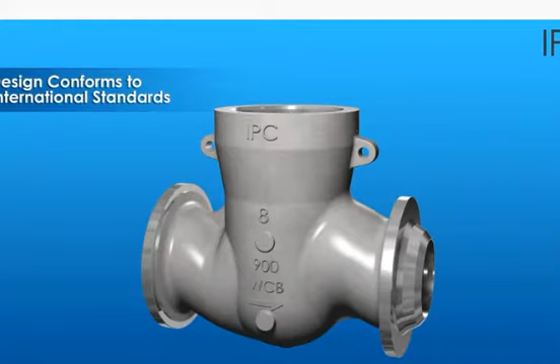هذا النوع الاول اللي هو الدور فالف. هذا هو التركيبه والستركشر الداخلي مالته. هذا البلاك اللي يسوي الاسامبلي، هم البلاك مالته هذا اللي يسد ويفتح الليكويد من خلال البايبات. مثل ما تلاحظون، تشوفون انه شلون جاي يفسخ ويرجع يشد الفالف أو الصمام، هذا الدور فالف.

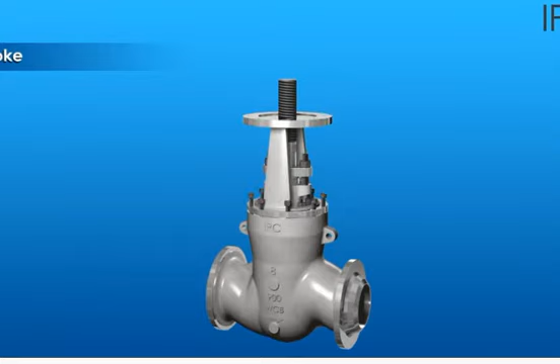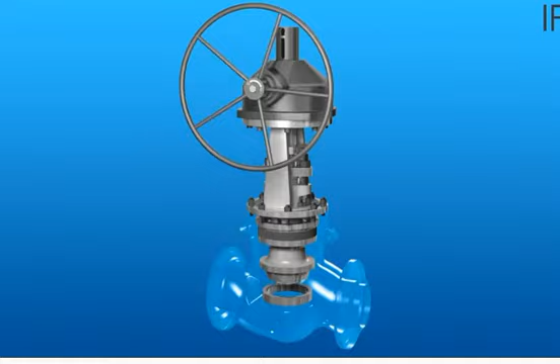يحول الحركة المنوال الميكانيكية إلى حركة عمودية شمالا، صعودا ونزولا، حتى يفتح أو يسد الفالف. مثل ما راح تشوفون الآن ربطه على البايبات، شوف شلون.

الآن راح نشوف البترفلاي، النوع الثاني من أنواع الصمامات، صمام الفراشة.

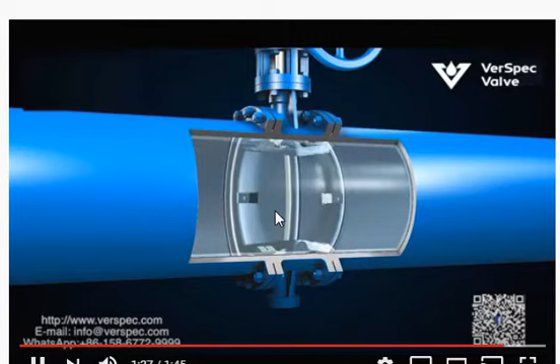الآن نجي إلى أهم صمام أو شائع الاستخدام في القطاع النفطي وهو النيوماتيك فالف، أو أحيانا اصطلاحا يسمونه الكنترول فالف.

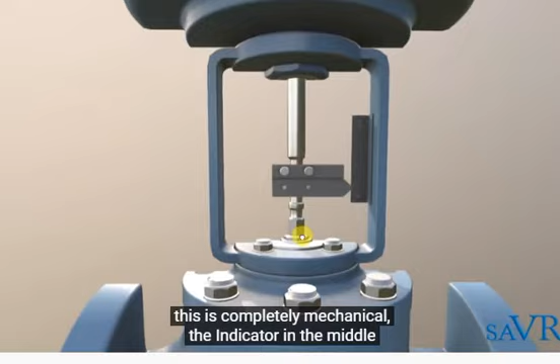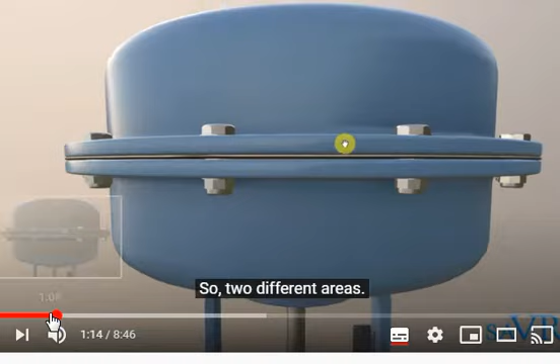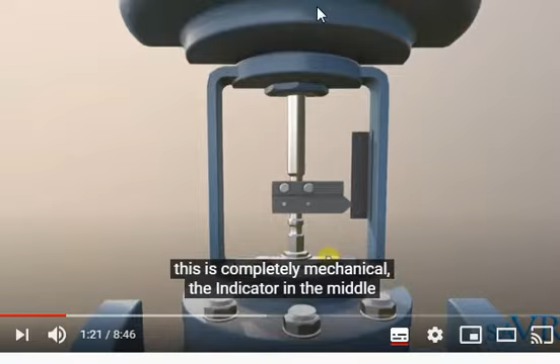عادة الصمام ممكن تصنيفه بالنحو التالي: هذا البارت الميكانيكي مالته البودي، وهذا بارت الانديكيتر مالته بالاضافه الى الشفت، لان هذا الشفت راح يصعد وينزل، وبالتالي يعطي انديكيتر ايش قد صعد وايش قد نزل، المؤشر البوينتر مالته. والبارت الثالث هو البارت البنيوماتيك، the pneumatic section on the top.

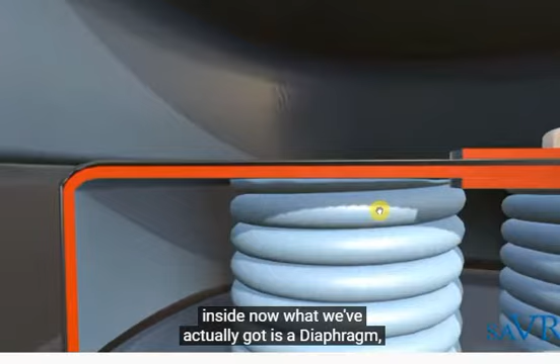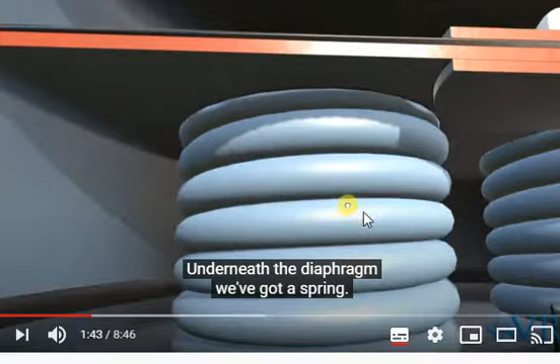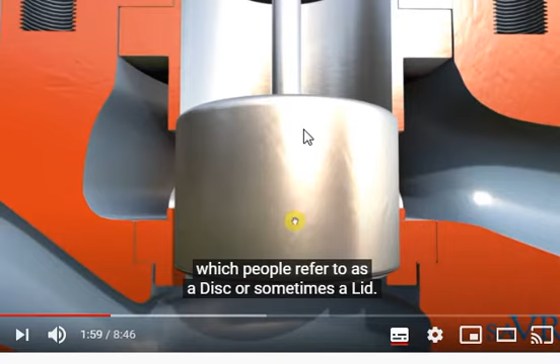Below that, you go down, we've got our indicator again, and the shaft comes down here and connects onto this item, which people refer to as a disc or sometimes a lid, and that is going to move up or down, and that is essentially going to open or close the valve.

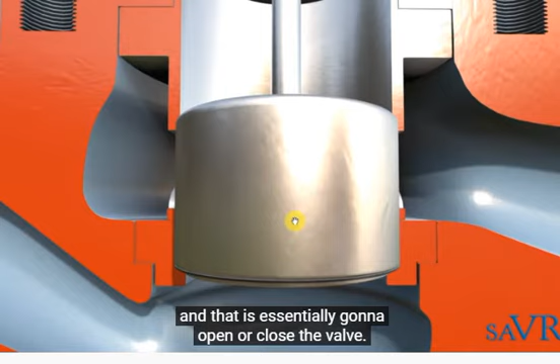This type of valve is called a globe valve, and we can see from its shape, it shapes slightly like a globe valve if you've got a very warped sense of vision.

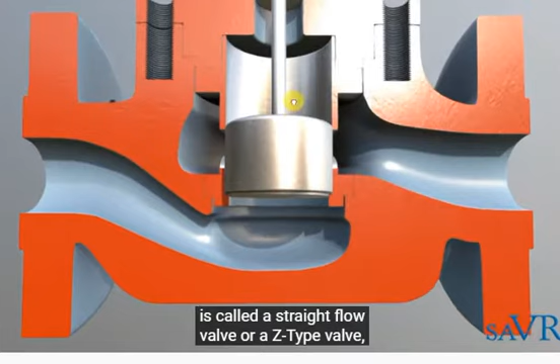Straight flow valve, or a Z type valve. Z referring to the flow coming down here and then going back up and then back out. Obviously we can't do that at the moment because the valve is closed.

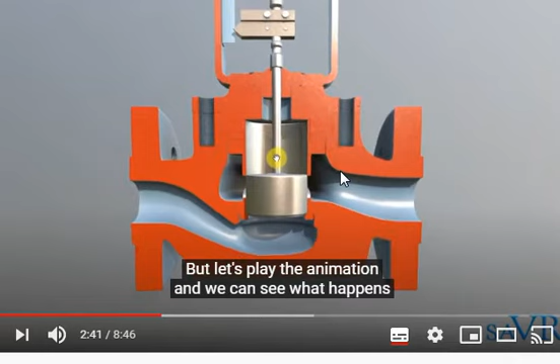But let's play the animation and we can see what happens when we drain the air from the system. We can see it's moving back up.

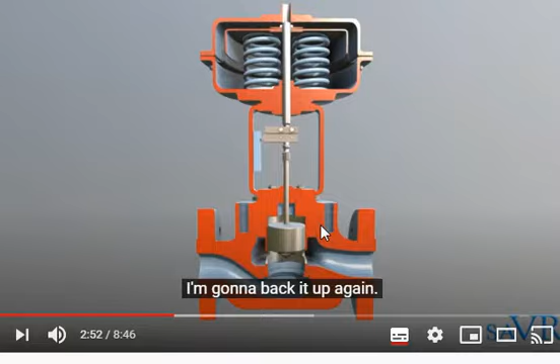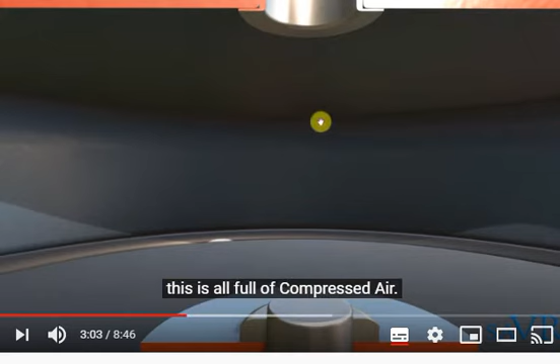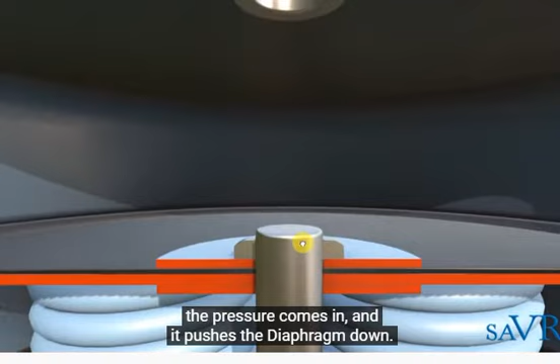So what just happened, I'm going to back it up again. At the top, in this space, this whole compartment above the diaphragm, so above the black area at the bottom, this is all full of compressed air. Now this is going to be 6 or 7 bar of pressure, and when we flood that area with compressed air, which is coming through this connection in the middle of the screen, we apply the air, the pressure comes in and it pushes the diaphragm down.

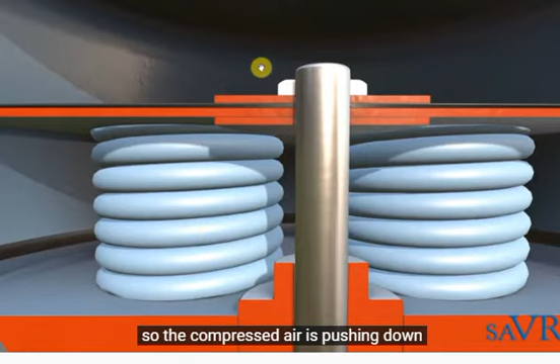What it's actually doing is overcoming the spring tension and it is compressing the springs. So the compressed air is pushing down and putting those springs under compression.

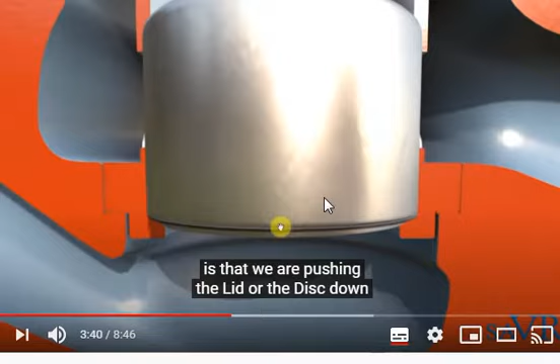So when we do that, the final result is that we are pushing the lid or the disc down onto an area which they refer to as the seat. The seat is this area here, it's where the lid meets the body. If you have any sort of contamination in this area, the valve will actually leak. So the seat is very, very important, as is the lid bit that sits on it.

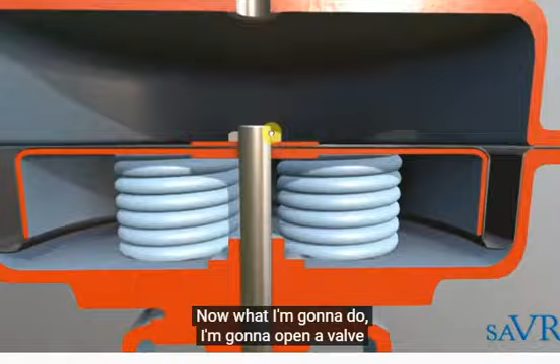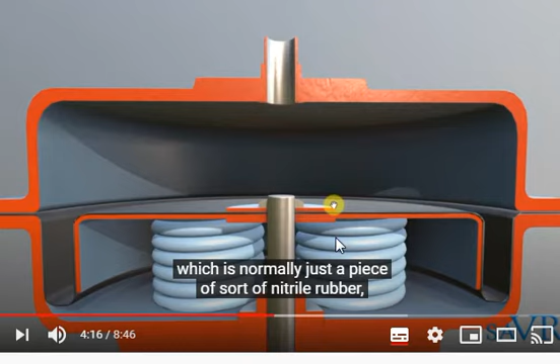Let's zoom out a little bit more. Now what I'm going to do, I'm going to open a valve and drain the air from this entire section. So everything above the black diaphragm, which is normally just a piece of nitrile rubber, which is actually quite flexible, I'm going to drain the air.

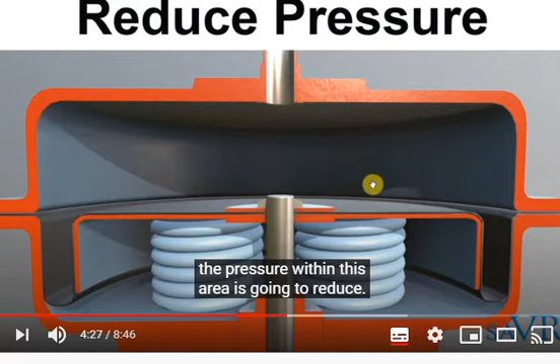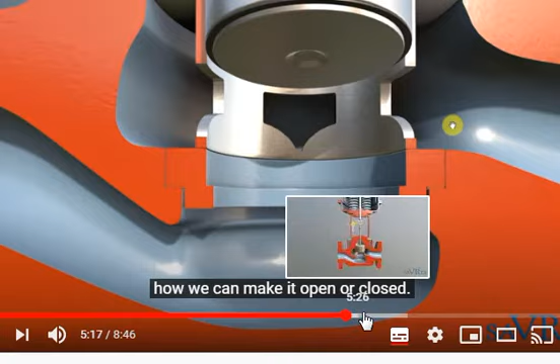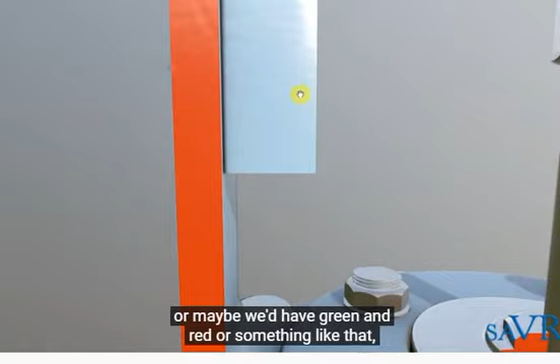Down here we would have a C, for example, or maybe we'd have green and red, and that indicates to us visually what the position of the valve is.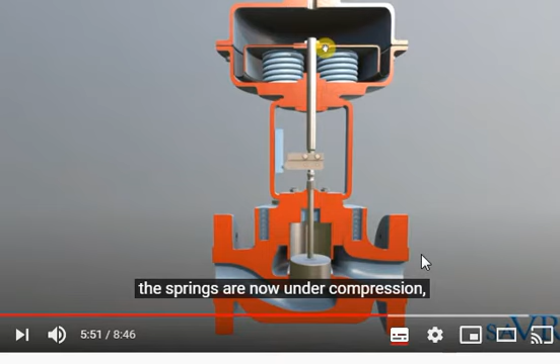Okay, the pressure is applied. It pushes the diaphragm down, the springs are now under compression, the stem moves down, and the stem ultimately closes the lid or pushes the disc onto the seat, and that closes the valve. So all we did there was open the compressed air to the diaphragm.

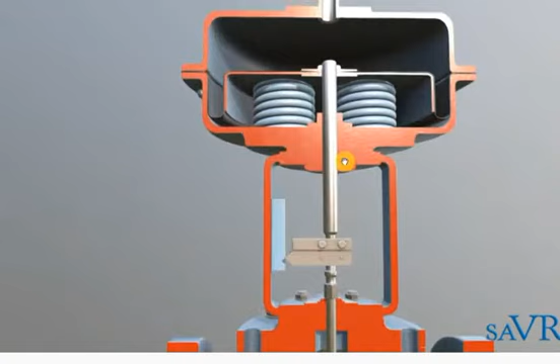Let's have a look now what happens when we drain the air. We drain the air and the springs, due to the tension or the stored energy that they have, they expand and they have now opened the valve again.

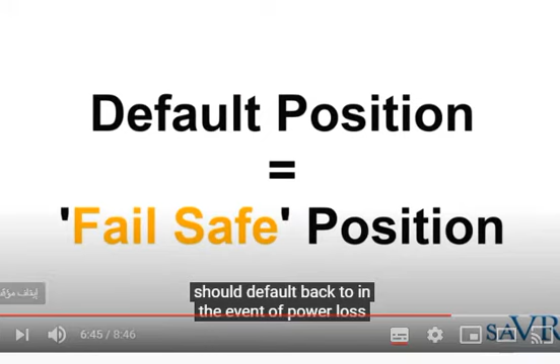We actually refer to this as a spring open, air closed. So when people talk about it, they'll say, oh, spring open, air closed. And that means the default position is when there is no air, the valve will be open. This is quite an important concept because a lot of times valves like this, they will have a certain position they should default back to in the event of power loss or a loss of air.

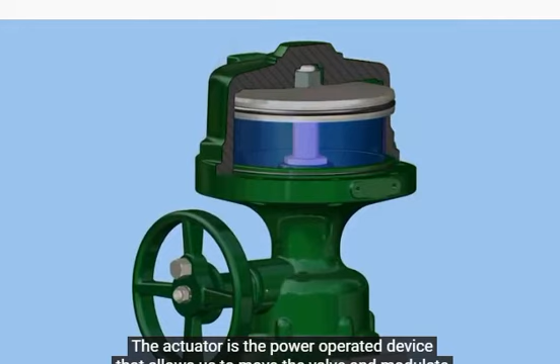The actuator is the power-operated device that allows us to move the valve and modulate fluid flow rates. As you can see here, actuators come in a variety of shapes and sizes to meet the needs of different valve applications.

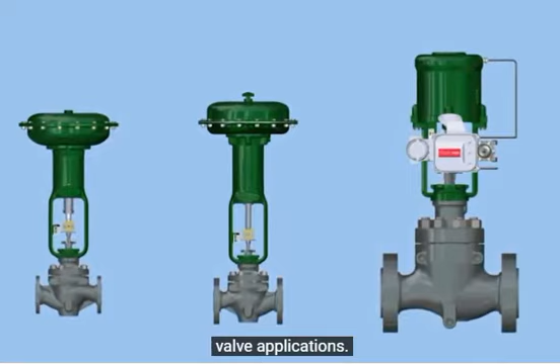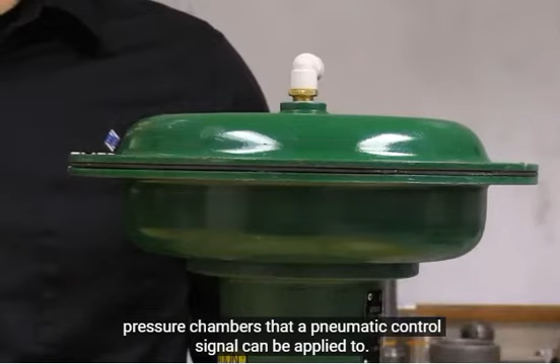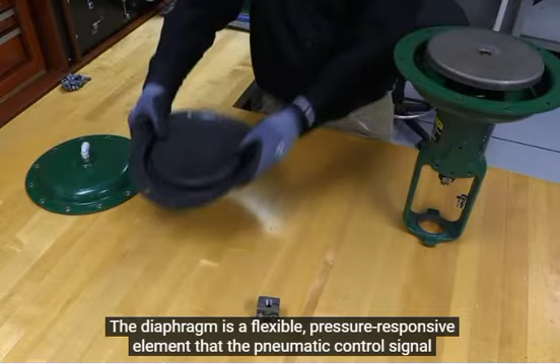Upper and lower diaphragm casings house the internal components of the actuator and create pressure chambers that a pneumatic control signal can be applied to. The upper diaphragm casing is removed to access the internal components. The diaphragm is a flexible, pressure-responsive element that the pneumatic control signal is applied to.

The diaphragm plate is a rigid plate that the diaphragm pushes against as pressure is increased. The actuator stem is connected directly to the diaphragm plate. A coupling block is typically used to couple the actuator stem and the valve stem.

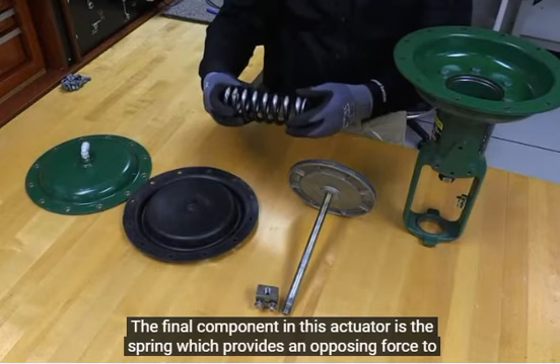The final component in this actuator is the spring, which provides an opposing force to the diaphragm and will also provide an inherent fail mode.

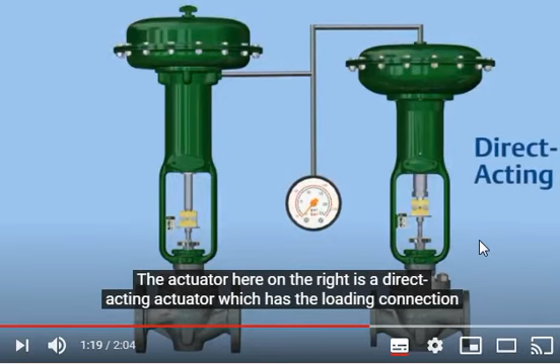The actuator here on the right is a direct acting actuator, which has the loading connection on the top of the diaphragm casing. The actuator on the left is reverse acting, which has the loading connection below the diaphragm casing.

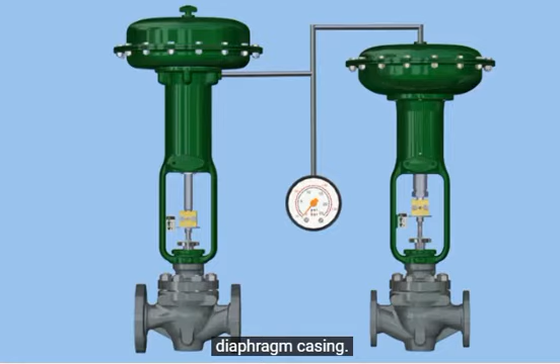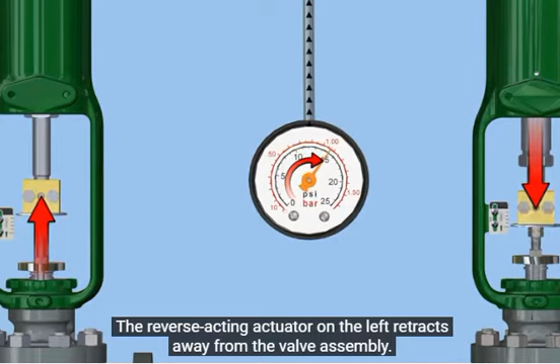As we increase the pressure, the direct acting actuator on the right extends toward the valve assembly. The reverse acting actuator on the left retracts away from the valve assembly.

Now, if the pressure is decreased or lost, the spring will move the actuator stem in the opposite direction away from the valve body. Thanks for watching, and I'll see you in the classroom.

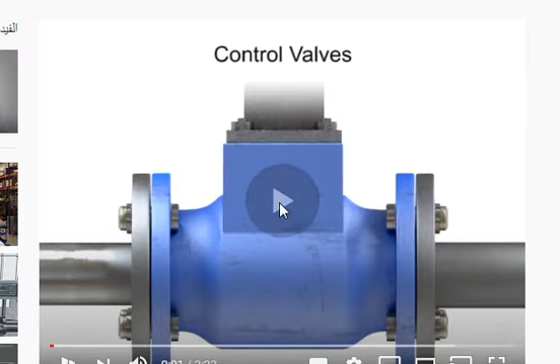Control valves control fluid in a pipe by varying the orifice size through which the fluid flows.

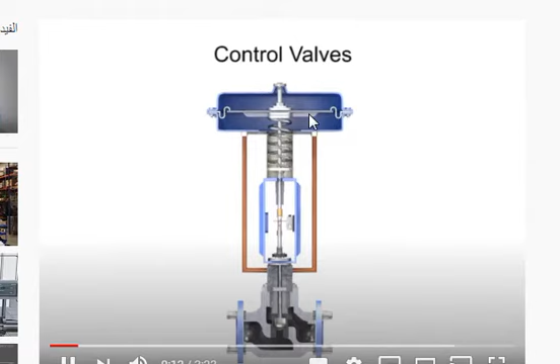Control valves contain two major components, the valve body and the valve actuator. The valve body provides the fluid connections and a movable restrictor comprised of a valve stem and plug that is in contact with the fluid that varies the flow. The valve actuator is the component that physically moves the restrictor to vary the fluid flow.

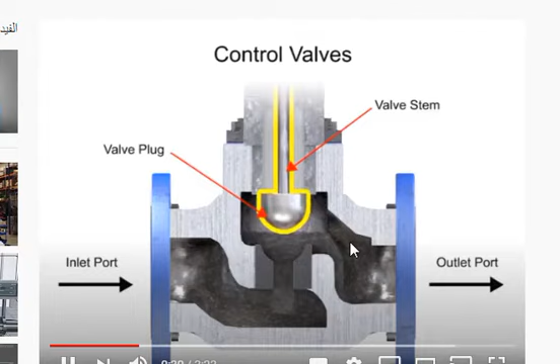Three actuator types are used in control valves, and they include spring and diaphragm, solenoid, and motor. As the name suggests, the spring and diaphragm actuator uses a spring and a diaphragm to move the valve stem and plug.

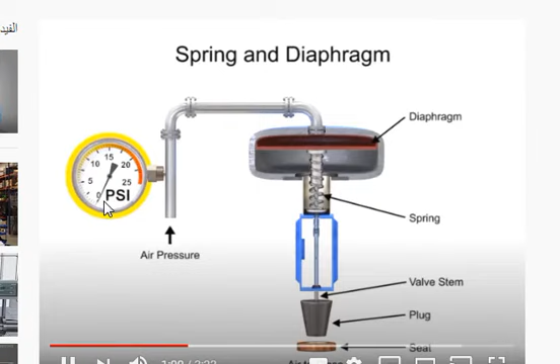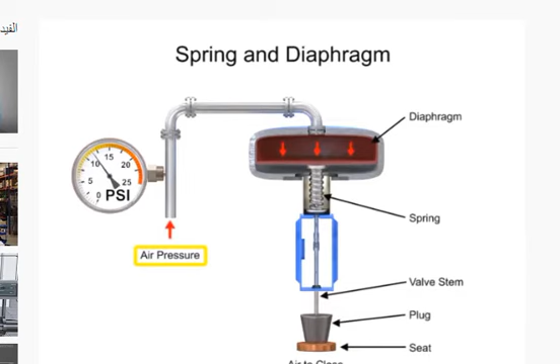A 15 psi pneumatic signal enters the housing at the top of the actuator. As pressure is exerted on the diaphragm, a downward force is applied against the spring, which moves the restrictor. The diaphragm moves until it creates an equal but opposing force against the spring, at which time the motion stops as the plug meets the valve seat.

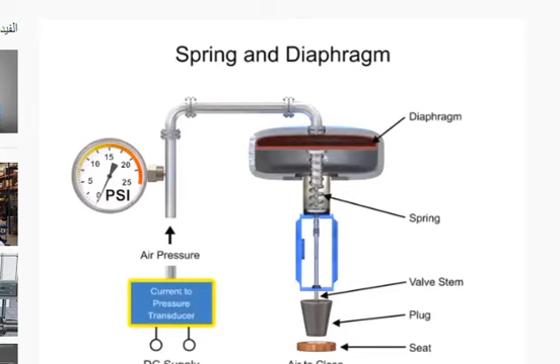With no air pressure, the restrictor is pushed upward by the spring to act as a normally open control valve. To vary the position of the restrictor and flow through the valve, a current to pressure transducer can be used to provide a 3 to 15.

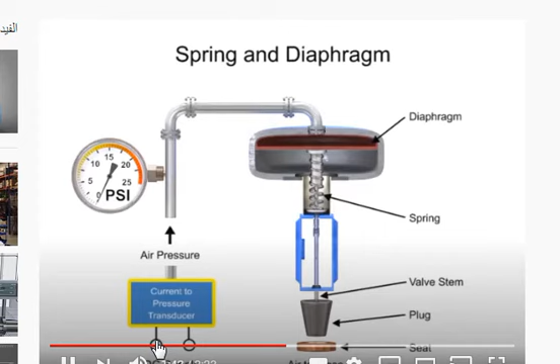psi signal to the diaphragm. At 3 psi, the valve is maintained open, and at 15 psi, the valve is maintained closed.

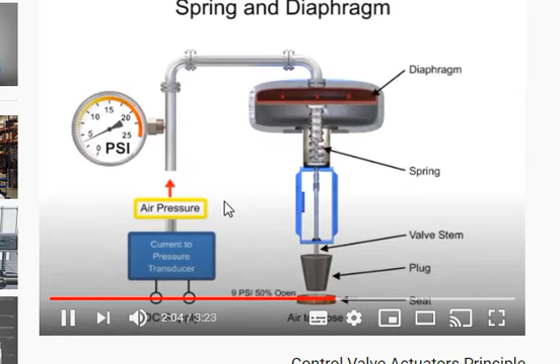Pressures between the 3 to 15 psi range proportionally change the flow of the valve. For example, a pressure of 9 psi applied to the diaphragm moves the spring and valve stem to 50% of operating range.

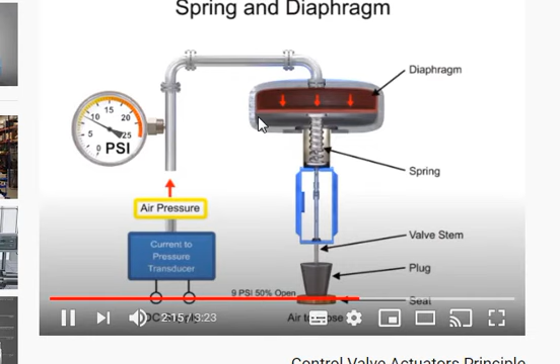For on-off control of the valve, we move to the solenoid valve.

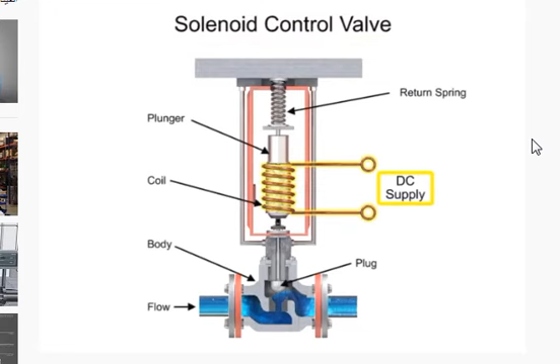Applying current to the coil generates a magnetic field that moves the plunger downward against the return spring.

With zero current applied to the coil, the spring pulls the plunger upwards to the fully open position for a normally open state control valve.

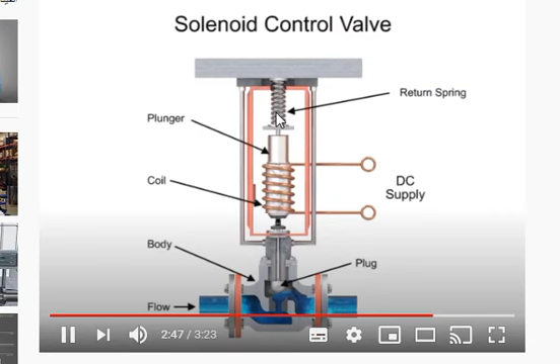Another method for variable valve positioning uses a motor and is referred to as proportional control mode. Using a gear motor attached to the valve stem, a servo amplifier provides a DC control.